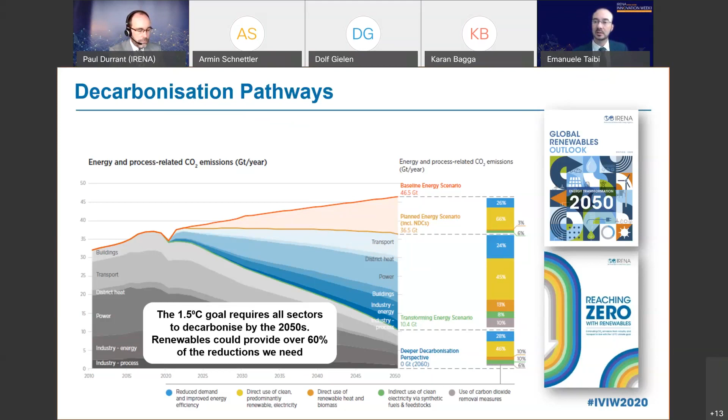So from a more quantitative perspective, setting the scene: these are the combination of insights from the latest Global Renewables Outlook and the freshly released Reaching Zero with Renewables. The point of this chart is that we need a set of solutions through renewables, energy efficiency, and hydrogen to get to zero. Increasingly, the message here is that the closer we get to zero, the more we will need to produce hydrogen derivatives to decarbonize the so-called hard-to-decarbonize sectors.

Just a quick overview on the challenge in terms of the economics of hydrogen. Today, with some of the best renewable resources at $40 a megawatt hour and current cost of electrolyzers, in some places we see better prices already today. This is from one year ago: we are still at about $3.50 a kilogram, which doesn't make it competitive with alternatives from fossil fuels.

However, with the cheapest renewable resources we're seeing today—which has improved over the last year to $20 a megawatt hour, and we've seen auctions at $15 and below these days—from $20 and below it starts to get very interesting. So what we need next to get a very strong, compelling economic case for green hydrogen is to reduce the cost of electrolyzers. We have a moonshot there: the best we guess we can get to in the next few years or few decades is $200 a kilowatt, which in combination with the best renewable resources will get us extremely competitive with alternatives, including blue hydrogen from fossil fuel with CCS. This essentially means that the combination of renewables and electrolysis is what can get us there.

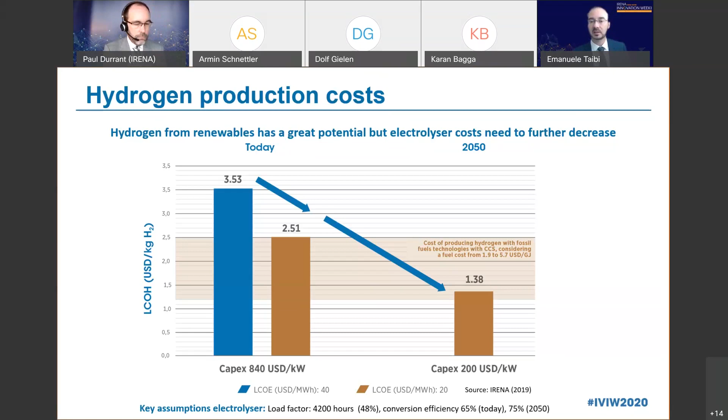Just to give a bit of perspective on how important the electricity price is: in this case, we fixed the cost of electrolyzers to a very ambitious target. We're not there yet, but we have estimates we might be able to get there in a decade, which is fairly good given the pathway to zero requires hydrogen to come up to speed in the next decade. This is the challenge we're trying to tackle today—how to get from zero to a very significant market in 10 years, by 2030.

In this case, you can see that cheap electricity is a prerequisite to get to a competitive hydrogen level. To go below $2, the only chance is to get to at least $20 a megawatt hour and below price of electricity. So only the biggest, best renewable resources can achieve that.

Less sensitive, but assuming we have this $20 a megawatt hour, then what we need to do is further reduce the cost of electrolyzers to get below $2 and into the territory of blue hydrogen and other alternatives. What you see here is that it is less sensitive than electricity, but it's equally important to scale up the production of green hydrogen through more affordable electrolysis.

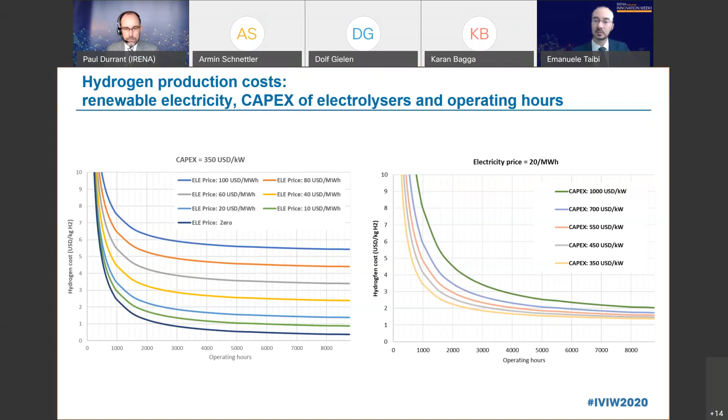So this is our forthcoming report on the subject.

For those of you not familiar with electrolyzers, essentially these are machines that can split water into hydrogen and oxygen—a very well established technology, deployed for over a century for different purposes, now for producing green hydrogen for energy use. What we're doing is to track projects that went from few kilowatts or hundreds of kilowatts a few years back to now, with announcements moving from hundreds of megawatts to gigawatt scale, and we're hearing new announcements every day reaching gigawatt scale.

What we need to do in parallel is get R&D to give us the next generation of electrolyzers while we scale up what we have today, which is already quite good. You will hear from our excellent panel discuss that in a minute.

So two key points, I think trade-offs are very important. Durability, efficiency, and cost have a trade-off. If you make it more durable, you might end up making the electrolyzer less efficient. Overall, you need to balance this to get the minimum cost of hydrogen, which is the objective.

An electrolyzer can be looked at from the perspective of a cell or of a plant. When we look at a plant, there is more than just the electrolyzer stack inside—there's much more. Our panel will talk about it, but I will also have one slide about this.

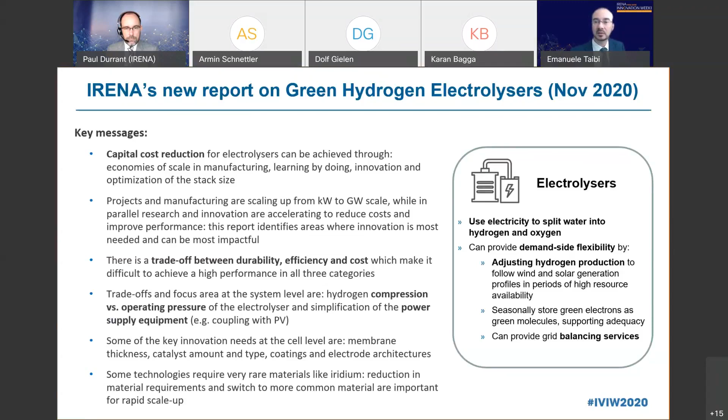One point is that we really need to look at materials, because some materials we're using are very scarce. As we scale up orders of magnitude, which is what we need, we might have some bottlenecks along the way in the supply chain.

Next slide, please. So this is, in brief, a very simplified view of an electrolysis plant.

You have the stack, you have electricity from renewables coming in, you need a transformer, you need a rectifier, and then out of the stack you get the hydrogen and the oxygen, which you need to compress and clean and feed into either a pipeline, storage tank, trailers, or ships. It really depends. And of course you need feed water supply.

This is not an issue where there is even seawater. Even considering desalination, it's not a major expense, yet it has to be a significant volume of water accessed to produce hydrogen at scale. The cost is about 50-50 between the balance of plant and stack components, with different potential for cost reduction.

Next, please. So for the balance of plant, there is a significant scope for reducing the cost of power supply—this is power electronics. We've seen a dramatic reduction for solar PV, and we'll probably see the same here.

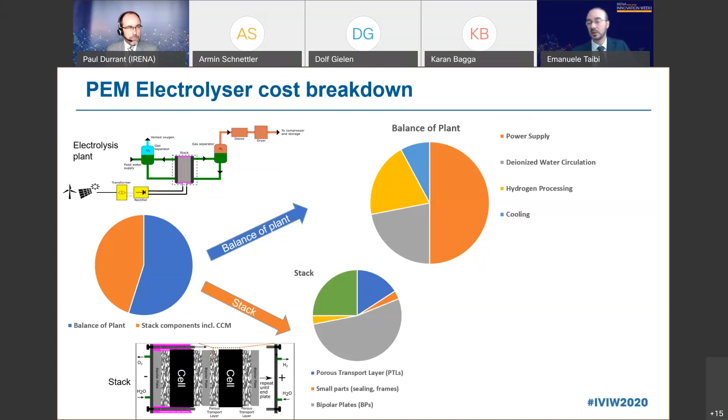Next, please. The core of the plant is the cell stack, and this is where it gets quite technical on electrochemistry. Important to note, we have several components, and parts like bipolar plates, which are not very well known outside of the industry, take a significant part of the cost.

Next, please. And then the very core, the catalyst-coated membrane, is where we see materials like iridium and platinum—here I'm talking about PEM, just as one practical example. This is where the rare materials are typically situated, and this is where some potential cost reduction can be tackled, but this is yet 25% of the stack, and so about 10% of the total plant.

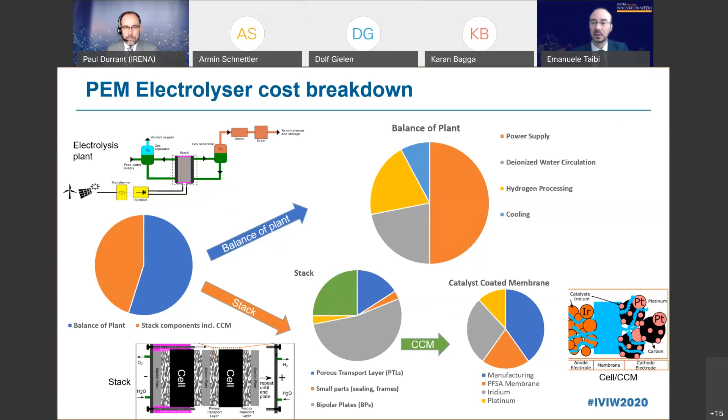Next, please. So let me conclude with what I mentioned at the very beginning. We established a collaborative framework on green hydrogen based on the call at the 10th assembly from our members to continue the dialogue between public and private sector. We have an excellent dialogue set up for today as well.

The idea is that this is very much appreciated by governments, to get insights and views and perspectives from the private sector on how to scale up, and at the same time suggestions on how to make policies and regulations align with the objectives we're seeing coming up in more and more hydrogen policies around the world.

We have a few elements identified as priority: knowledge sharing, collaboration with hydrogen initiatives—we're very pleased to collaborate with IPHE and the Hydrogen Council, which will respectively be moderating the next session and are partners for the session and the next keynote today. The nexus between hydrogen and renewables is clearly IRENA's mandate, and of course knowledge about all steps of getting hydrogen from production to consumption is very important, as well as standards, regulatory framework, and best practices.

And with this, next slide, please. I conclude my presentation. Thank you very much for your attention, and I look forward to the discussion to follow.

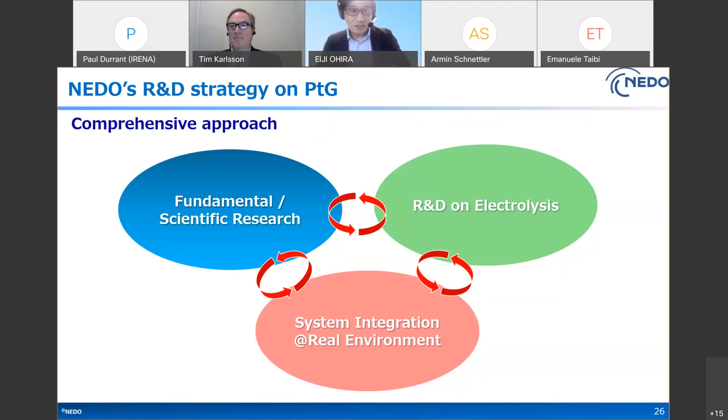So next, please. Okay, this is an approach.

The fundamental research is to understand the inside of the reaction of the electrolysis. We did several approaches: electrode, electrolyte interface analysis, observation, bubble behavior, accelerated degradation protocol, reverse current behavior analysis. These should be important for us.

We integrated this kind of analysis technology to develop a platform to understand the electrolysis itself, and we feed back this information to the material or CCM development. Well, next please.

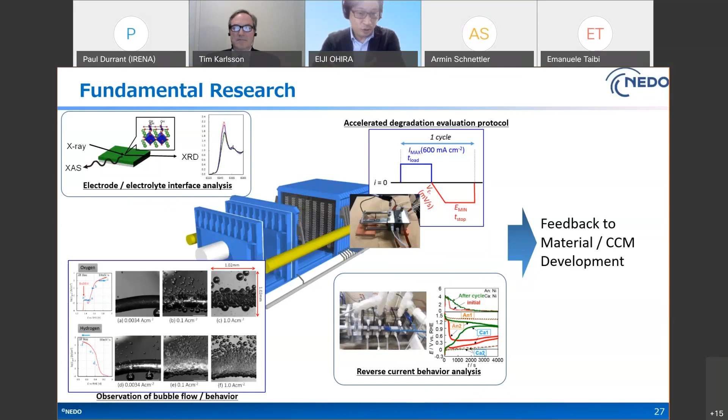This is our approach for developing electrolysis technology. Now we are focusing on alkaline electrolysis and PEM electrolysis in the short term.

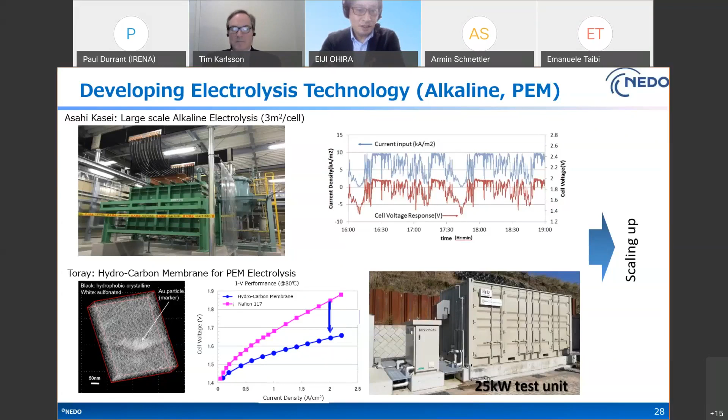Now NEDO has been conducting two types of large megawatt class Power-to-Gas projects. First, we started the kilowatt class around 2015, and after closing that project, we moved to the megawatt class.

Our first plant provided green hydrogen to the Tokyo Olympic Games this year, but unfortunately it's postponed to 2021. Maybe I'll be happy to introduce this technology for maybe the next Tokyo Games.

Later on, we also developed a 1.5 megawatt PEM water electrolysis Power-to-Gas plant, and we utilize large scale metal hydride hydrogen storage combined with compressed hydrogen storage.

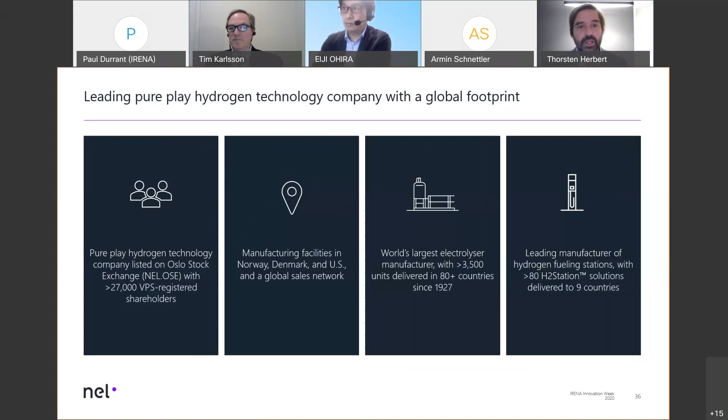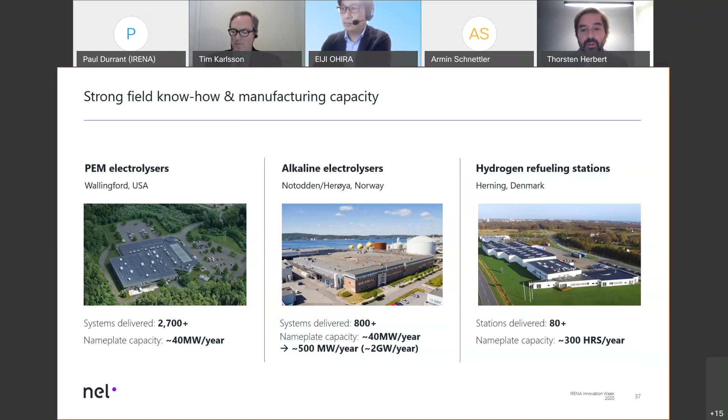Looking into the manufacturing facilities, and pointing out one very interesting fact: if you look at the PEM electrolyzers, we are now in the US with 40 megawatts per year capacity. But the highlight, and I will dive deeper into that in one of the later slides, is that we are now preparing the plant in Norway to be capable of an output of 500 megawatts per year by end of next year. This is currently in the process. And a very good perspective is that this location, which we also see in the picture, is already capable of being expanded to 2 gigawatts per year just by quadrupling the equipment here. And then the refueling stations in Denmark, we are ready to build up to 300 stations a year.

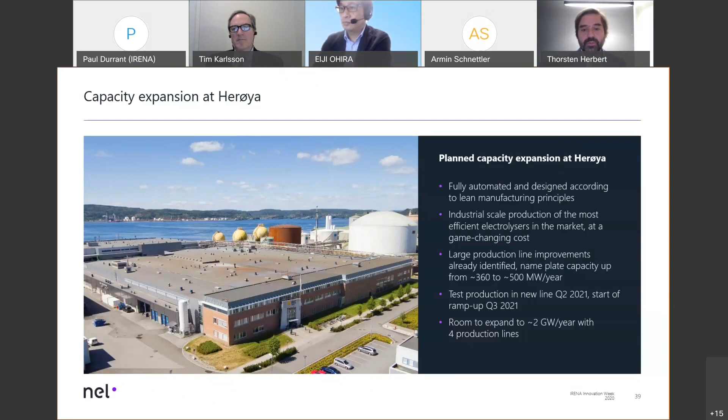So, two latest developments. Again, one highlight for us, and that leads me to a comment on one of the earlier presentations - the introduction by Emanuele, looking at the scenario with $350 per kilowatt, really with the perspective to have this huge capacity and the fully automated manufacturing principles in place already soon. We just lately, in our latest deal, already sold our alkaline technology in this price range. So if we really anticipate what we can gain from this upscaling in manufacturing capacity, we are already there. This will start test production mid of next year and will be ready for full capacity end of next year. And as I said, just by multiplying the lines, we would be able at this location to also ramp up to 2 gigawatts per year.

Looking into the technology, we lately got some key R&D grants newly granted - two quite large ones for our R&D activities, addressing both technologies we are offering. On one side, the alkaline electrolyzer: we have an R&D grant here in Norway improving the next-gen alkaline electrolyzer, also at pressure. And on the US side, a quite significant grant also to develop further our PEM technology with regards to components, manufacturing methods, but also optimizing flow and conductivity of the stack.

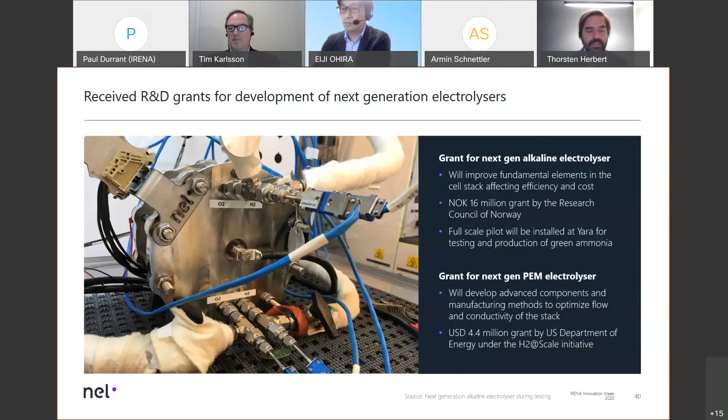Quickly looking into the European momentum. I think you're all aware that beginning of July, the European Commission came up with this very ambitious strategy - we're talking 40 gigawatts installed electrolysis capacity in 2030, but already 6 gigawatts in 2024. And this is actually, and that is one of my messages I want to bring across, this should be our main target. So we should, in Europe now, really focus on this 6 gigawatts in 2024 and come up with a roadmap of what we need to do, what we need with regards to policy measures.

One other thing before I come to the end: we already have funding mechanisms in place to come to this milestone of 6 gigawatts by 2024. But I think the key, as mentioned in my subtitle, is really that we as an industry cooperate and coordinate with each other to utilize these funding schemes in the most efficient way, and also address the additional needs we have.

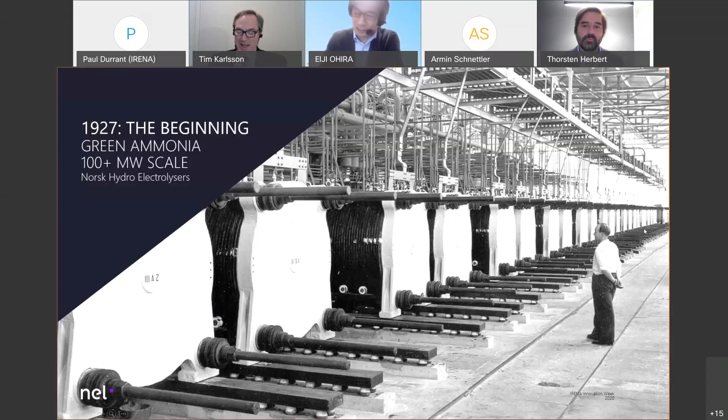Hello, I hope you can hear me well. Good morning from Brussels, I hope you are all safe wherever you are. It's a pleasure to speak to you this morning about large-scale PEM water electrolysis. I would like to give you an insight into the current status of the technology and a little bit about the way forward. Next slide, please.

First, I need to make an introduction, because Hydrogenics was well known in the field of hydrogen, but Cummins is, I would say, the new kid on the block in hydrogen. Cummins is in fact a large US company with more than 100 years of history in the field of energy, mainly in combustion engines, diesel and gas engines, for both the mobility sector and stationary power generation. Due to climate change and the energy transition, Cummins decided to diversify its technology and entered into electrification technologies already in 2018. In 2019, there were several acquisitions in the field of hydrogen and fuel cells. Cummins has more than 60,000 employees worldwide and a presence in more than 190 countries.

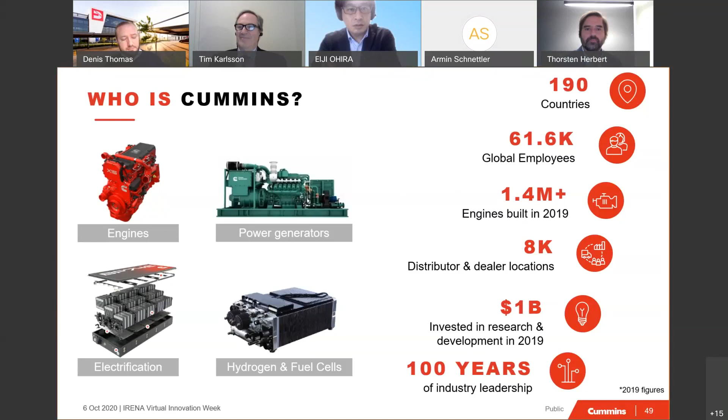Next slide, please. The activities of Cummins in the field of hydrogen are quite wide. We have technologies in electrolysis, which I will present in a minute. We also have technologies in fuel cells, and in hydrogen storage tanks. The idea is to be able to offer complete systems, both on the electrolyzer side and on the fuel cell powertrains for mobility.

Among those acquisitions, the major one was Hydrogenics, which included electrolysis and PEM fuel cells. A couple of years ago there was also the acquisition of the solid oxide fuel cells business of General Electric. And there is a joint venture with NPROXX in Germany on hydrogen storage tanks. The aim is to be a top performer in industrial hydrogen generation, but also in Power to X, which I think is the focus of today's discussion. On the mobility side, our focus is mainly on heavy-duty mobility, like trucks, trains, buses, etc. Next slide, please.

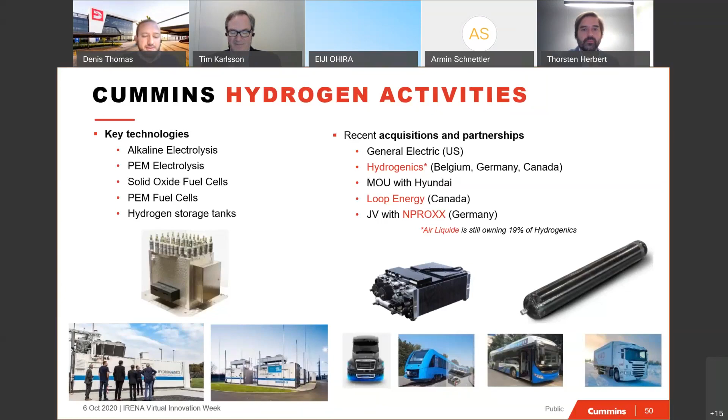Concerning electrolysis, we are one of the few companies having different technologies in electrolysis. Alkaline: we've been active in that space for more than 30 years, as you can see on the product table, and I know a lot of you like numbers, that's why I've included that slide in my presentation. At Cummins, our alkaline technology is more in the kilowatt scale, because we use pressurized technology up to 10 bar, with a possibility to increase it up to 27 bar.

Our biggest product is in the range of half a megawatt, with a production output of 100 normal cubic meters of hydrogen per hour. The philosophy on those products has always been to deliver turnkey systems, including all the utilities, with a plug and play design.

On the PEM technology, which is really the focus of my presentation today, we've been developing this technology for over the last 10-15 years. We already have commercial products at 2.5 megawatts, which are containerized systems, and we are currently developing our product towards 5 megawatts and bigger. In this case, we will not follow the containerized turnkey approach, because we believe that for bigger projects there is a need to integrate those technologies into much more complex systems. So we are partnering with a lot of EPC companies, because we think they can bring a lot of value and know-how, and they can bring a lot of cost savings to large-scale systems.

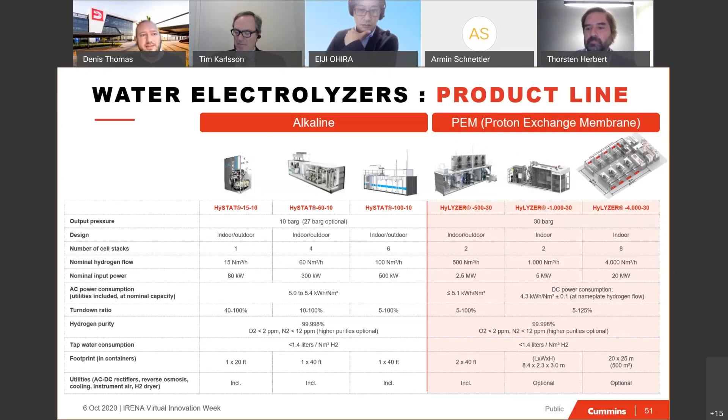Obviously, the building block that we use for the PEM technology is a PEM cell stack, with cells with a surface area of 1,500 square centimeters. What you see here is a 1.25 megawatt cell stack, which can also operate up to 1.5 megawatts, and that's the building block of the current commercial product.

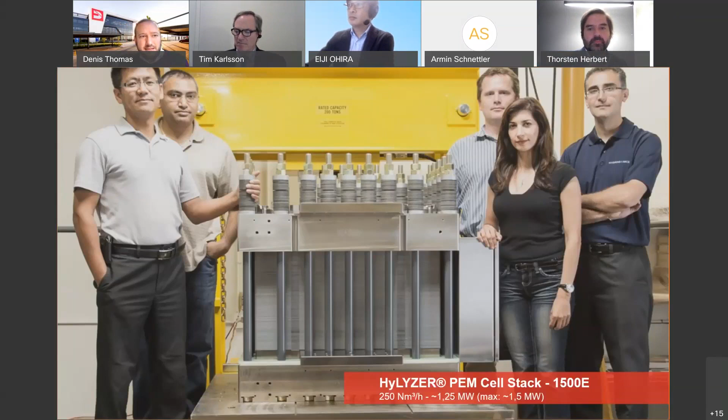Using that building block, this is the type of system that we can deliver today on a commercial basis, between 1 megawatt and 2.5 megawatts, just by playing with the number of stacks used in that system. Obviously, one important word when we speak about cost reduction is standardization, and that's something we are developing right now, to make sure we use standard platforms that will allow us to reduce cost in the long term by getting into large volumes.

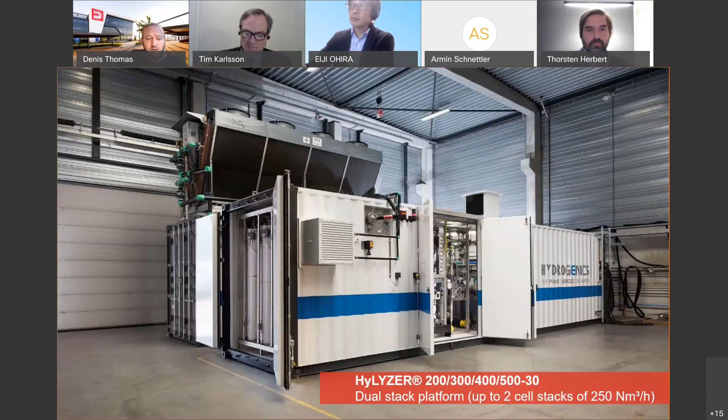Concerning this technology, it has already been deployed at a number of sites. We have more than 15 projects in the megawatt scale range, for various types of applications and in various geographies. You see some of those pictures here.

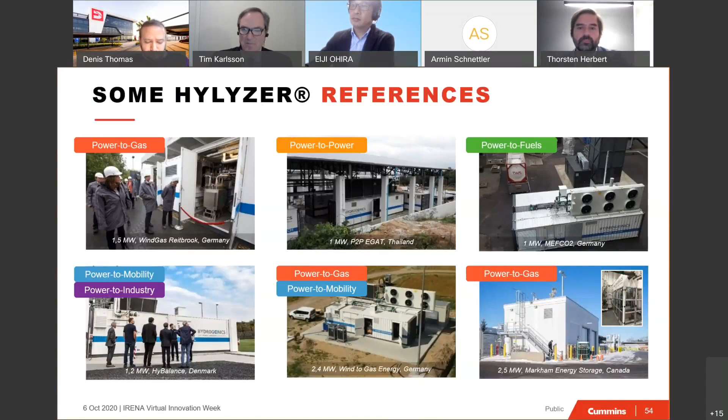Concerning the current development, we are upscaling our building block. The 1.25 megawatt cell stack, we are doubling its capacity by doubling the amount of cells. And obviously, by doing that, you don't double the cost. Our general philosophy at Cummins is bigger is cheaper, and that's what we will follow also for the balance of stack and balance of plant. By doing that iteration, we end up with a building block of 2.5 megawatts, which is interesting for megawatt-scale projects.

Again, we are also at the very initial phase of the learning curve on PEM technologies, so we still see a large potential for cost reduction with this technology.

Concerning efficiency, I've presented the efficiency numbers in the table of products, and I think this was also related to some of the questions in the chat: how do you compare efficiencies? I think it's really important that each time you mention this, you refer to what you're actually discussing in terms of scope of supply.

Concerning the PEM technology, it is very well suited to connect directly with wind or solar energy, because it has the ability to react very fast to dynamic operation, in terms of seconds, with a very wide operating window. It is also very compact, and has a lot of benefits in terms of maintenance, especially because we don't use KOH, which is the case for alkaline technologies. Finally, with this technology we can deliver systems with a 30 bar output pressure, which is quite interesting when you want to make power-to-gas systems, or if you want to inject the hydrogen into industrial processes.

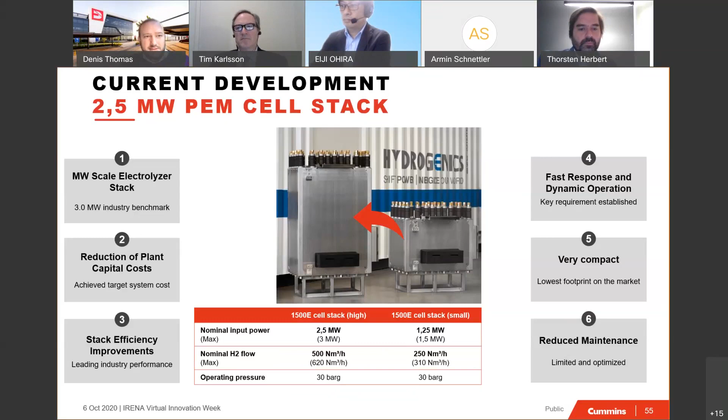Using this 2.5 megawatt building block, we have developed the HyLYZER-1000, a 5 megawatt product integrating 2 stacks of 2.5 megawatts. What you see here is the standard and modular solution we offer today, including the heat exchanger, the water polishing system, and the gas-liquid separators. It's an indoor system, but to allow safe operation, we have enclosed all the sensitive areas where hydrogen is generated.

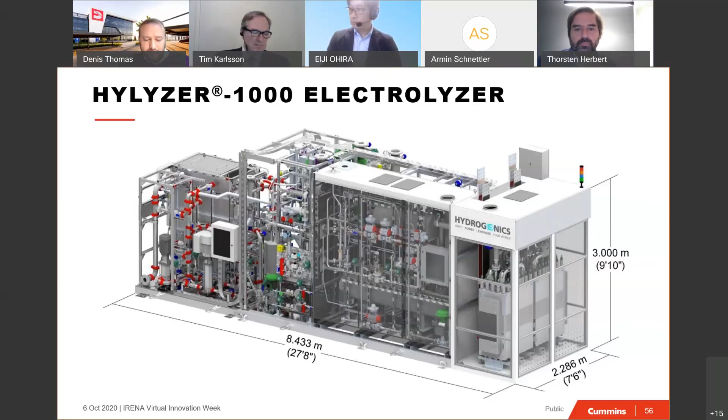And that's typically the type of scope of supply that we would see for Cummins in the future. And then all the rest of the plant, meaning the water purification system, the cooling of the systems, and all the medium voltage—that's something that can be done by a local EPC, which can actually lower the cost of the complete system.

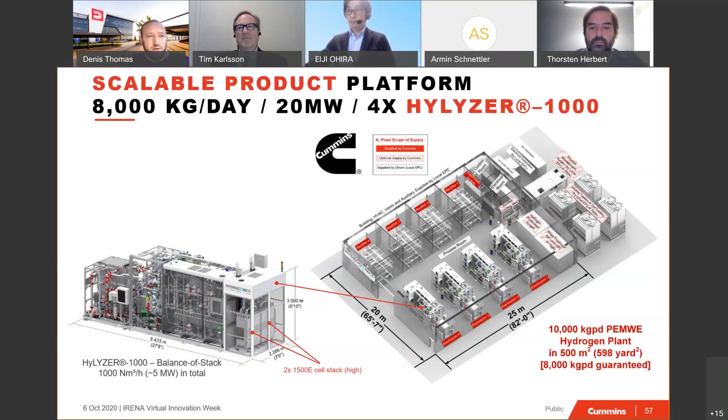Next slide, please. So to conclude, what I want you to remember is that bigger is cheaper. That's what we think. We are today validating this 20 megawatt project, which will be the basis for projects up to 100 megawatts. But if we want to be able to deliver gigawatts, we will need to make a next iteration into our products.

For us, it will go through bigger stacks, even more than the 2.5 megawatts, also bigger systems, having more stacks sharing the same balance of stack, and obviously standardization and partnering with EPC companies.

Thank you for your attention.

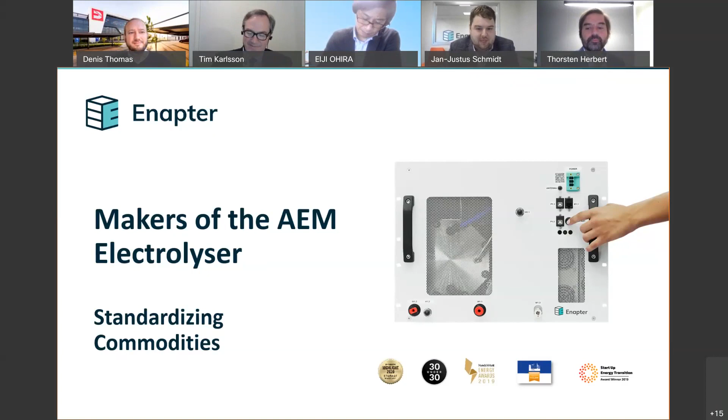So at the core, Enapter is an R&D company. Our origins lie with a catalyst development team that was working on non-PGM catalysts, and then developed the foundation of our electrolyzer technology. Today we continue to strongly invest into this path and develop our electrolyzer technology. It's really fun to work at Enapter because our AEM electrolyzer technology is quite young compared to the traditional alkaline and PEM technologies, and so we still see even now a lot of untapped potential to further improve it.

So on this slide, you can see our current product, the EL2.1. We're really proud of this machine. It's been developed over the last 2 years, iteratively developed over the last 2 years. And this machine is now significantly more compact, more efficient, and lower cost than all its predecessors.

And we think it has a very strong position in the market with regard especially to energy efficiency and cost for this type of size of unit. Each EL2.1 produces 500 normal liters of hydrogen gas per hour, already pressurized at 35 bar. And multiple units of these can just be stacked together to reach any desired production rate that is needed for a project.

So why is it that we are building such a relatively small building block, and why can we do this cost effectively? The answer is on the next slide, and it lies in our patented AEM technology.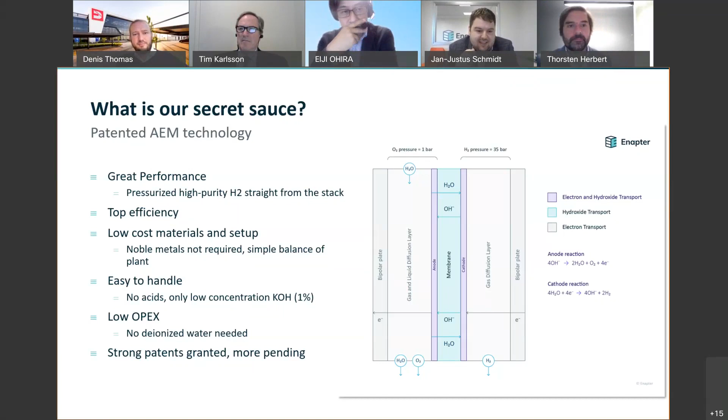So talking about efficiency, I've included here a polarization curve, for everyone to understand the actual underlying details of the performance of the electrolyzer. Currently, when we are operating at nominal production rate, we run our stacks at 0.8 amps per square centimeter. You cannot directly compare this with other technologies, but within a technology, you always want to improve the current density to be able to have a smaller stack with less active area to produce the same amount of hydrogen. At our current density of 0.8 amps per square centimeter, we operate at a cell voltage of just over 1.7 volts, and this leads to a really great stack efficiency.

Our balance of plant is so simple that actually also for that only very little energy is needed. Our current system has a steady state power consumption of 4.8 kilowatt hours per normal cubic meter of hydrogen - that's for the complete system. For the stack, it is actually just 4.3 kilowatt hours per normal cubic meter.

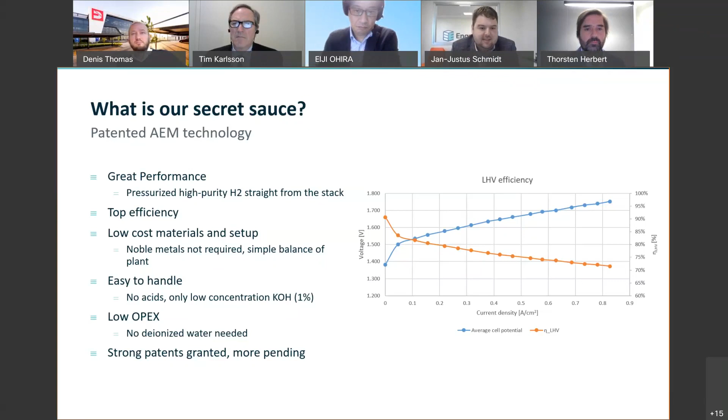Okay, so I've mentioned it in the beginning - we are scaling in a very different way. Rather than building very large individual units, we are building small units that we want to mass produce. You can draw an analogy to PV panels, for example, or also to the IT industry. In the 1980s, computers were getting bigger and bigger, filling up entire floors and skyscrapers just for a computer for one company. And these mainframes, these big computers, they don't exist anymore. Nowadays, all servers and large computing centers are built up from modular computers, blade computers that are just stacked together. And all of this is based on PC architecture that has replaced these giant machines with modular small commodity items.

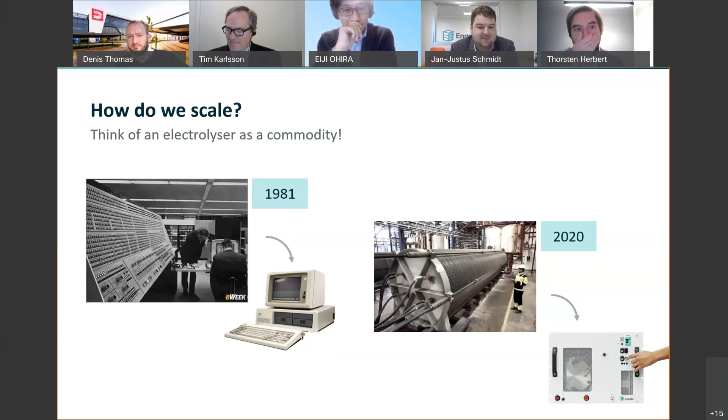And so our electrolyzer is the PC of the hydrogen industry.

This is where we are at with our development. So when we started in 2017 until today, we have almost halved the price of our electrolyzer, keeping the size and production rate the same. We are aiming to release a new version of our product every year, making each individual building block smaller, more efficient, and lower cost. So by the time that our mass production facility will be up and running, we think that the cost of our electrolyzers from today will be just 20% of what it costs today.

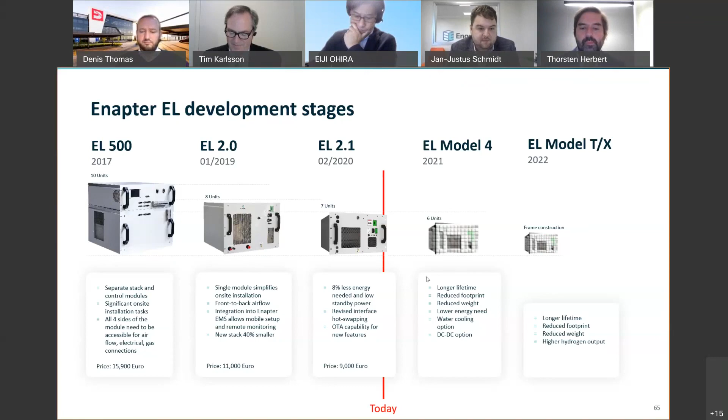Stackability is extremely important. So whereas each individual unit we want to make as compact as possible, we then have to stack them together to make them very easy to use for any kind of application. So today, most of our customers put our electrolyzers in cabinets, such as the ones on the left. And we are now working on deploying the first container, which has roughly 150 kilowatts. This is just made up of stacking EL2.1s together.

Then the other project that we are working on right now is the AEM multi-core. So when we're looking at large-scale systems, we see that we can benefit both from the cost reductions of the mass-produced electrolyzer building block of the stack, as well as the typical cost reductions that come with centralizing those components that do not scale with unit numbers.

So we can centralize the balance of plant for the megawatt scale system and just put in hundreds of our stack modules, and that can easily be stacked to the right number to match the production rate that's needed. With this kind of system, we will have extremely high reliability and extremely flexible control, because each string of modules can be individually controlled.

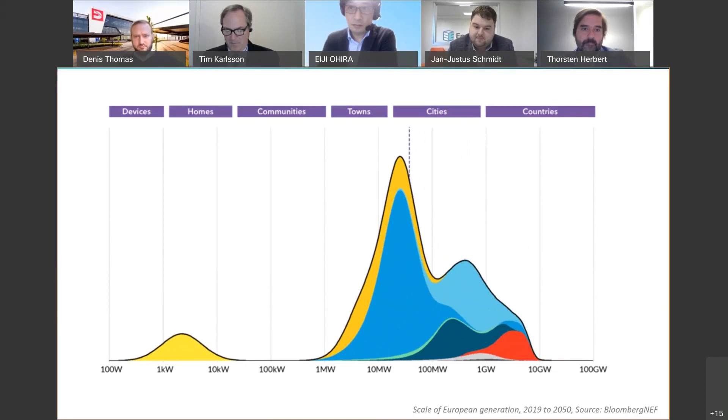The solar panel has disrupted the electricity world and made energy consumers into prosumers. We think that with our modular decentralized electrolyzers, the same can be done to fossil fuels.

Thank you very much for your attention, and look forward to the next discussions.

That's great, Jan, thank you very much for that presentation. When I saw the agenda, I very much looked forward to seeing your presentation, given your focus on small scale and modularized build-up versus some of the others. That was great that we got the full spectrum of electrolyzers and processes on the panel.

Thank you very much for that presentation. I would like to now move forward to the Q&A session with all the panelists. I hope all the panelists are now available. I have some questions that have come forward, and maybe I can start with a couple, and then we can check for some others as well.

A few of the questions we have - we did have a discussion around the efficiencies of electrolyzers, and there's a number of different versions, or at least numbers out there around what the efficiencies of electrolyzers are. I wonder if anybody would like to talk in general about this - we heard some numbers, but is there easy comparability? There's a number of figures floating around, and I'm wondering if one or more of you would like to talk about the energy efficiencies of electrolyzers.

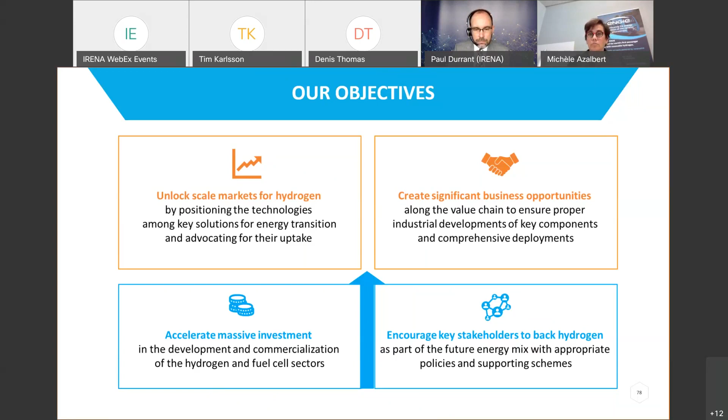Next slide, please. The Hydrogen Council has the ambition to first accelerate significant investment in the development and commercialization of the hydrogen and fuel cell sectors. Second, gather actors along the value chain to ensure industrial development of key components and comprehensive deployment of renewable and low carbon solutions based on hydrogen, while increasing visibility of existing hydrogen solutions and the progress being made in the sector. Third, provide recommendations and encourage key stakeholders such as policymakers, the business community, international agencies and civil society to increase their backing of renewable and low carbon hydrogen as part of the future energy mix with appropriate policies and supporting schemes. And lastly, advocate for the important role of renewable and low carbon hydrogen technologies in helping to meet climate goals, energy security and competitive targets. Next slide.

Our vision is that hydrogen has a key role to play in the energy transition. Based on an in-depth analysis of real industry data, we estimate that costs will sharply fall by 2030 thanks to the scale-up, making hydrogen a competitive low-carbon solution for 22 applications and addressing 15% of global energy demand. By 2050, hydrogen reaches its full potential, delivering 6 gigatons of CO2 abatement annually and 30 million jobs, representing a $2.5 trillion market. Full information about this report is available on the Hydrogen Council website.

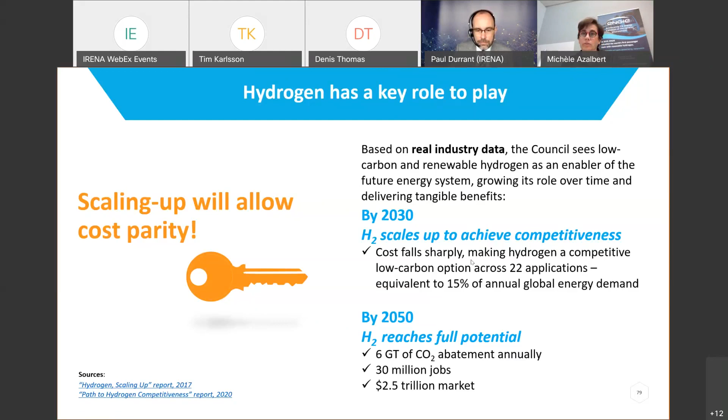The second part of my presentation is to share what potential we see for e-fuels, and more specifically for ammonia. Ammonia is today mainly used for fertilizer production. It's a first activable segment where the competitiveness gap between renewable hydrogen-based ammonia and fossil gas-based ammonia is the lowest, so it's a low-hanging fruit in terms of decarbonation. It also does not require changing the production process of ammonia, which consists in capturing nitrogen and combining it with H2 through the Haber-Bosch process.

Today, some figures: half of the 70 million tons of hydrogen produced annually is used as a feedstock for the production of fertilizer, mainly ammonia, and the rest is used by refineries for the production of biofuels, methanol, and other processes. So today, ammonia is a significant market on its own, and it will continue to grow at a rate of around 2 to 3% per annum according to experts. Most of the ammonia produced, around 80 to 90%, is used for fertilizer production, and the remainder is used for explosives and other chemicals like refrigerants, cleansers, textiles, resins, and so on.

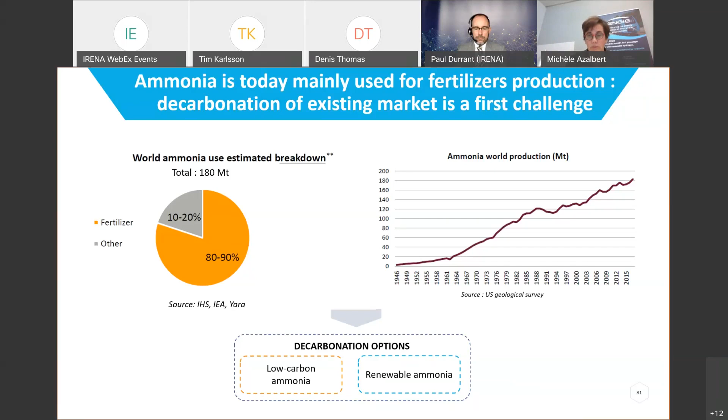In addition to the fertilizer sector, ammonia can also be a clean fuel for local cogeneration or coal plants, whereby you can inject ammonia directly into the coal plant to produce electricity. It can also be a fuel for mobility, thanks to ammonia fuel cells, serving as a clean fuel especially for heavy-duty mobility.

Beyond just ammonia, e-fuels will contribute to decarbonize mobility, especially heavy-duty mobility. Why so? Because batteries are not today the solution, mainly for autonomy and weight reasons. E-fuels entail a wide range of zero carbon or low carbon fuels, like gaseous H2, liquid H2, synthetic gas, renewable ammonia, e-methanol, e-LNG, and also e-kerosene, addressing different types of heavy-duty mobility: road mobility, shipping, aviation, and rail.

Today, within existing port facilities, within 120 ports, you already have ammonia trading facilities, so you can have direct access to that.

In addition to the potential of the fertilizer market, taking into account the potential of the heavy-duty mobility market, some experts consider that ammonia production could increase by 30% for the shipping market, representing 150 million tons per annum. It could also develop for energy uses, leading to an ammonia market of 430 million tons in the long run. This is 2.4 times more compared to what it is today.

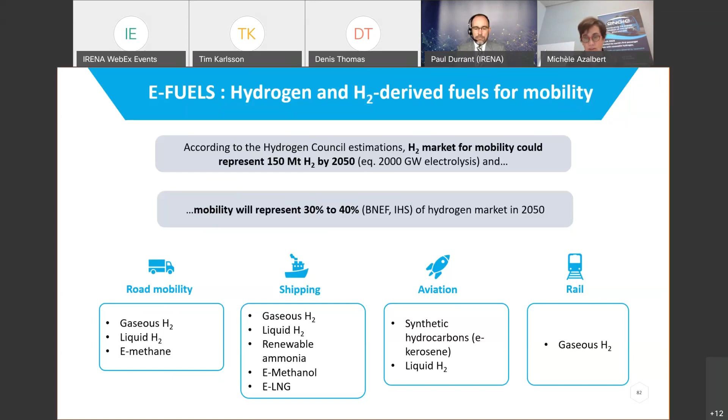In the long run, we will export renewable resources from countries having a massive excess of renewable energies to countries that will not have enough to meet their domestic demand. Today there are different options available. As an energy vector, hydrogen can be transported over long distances through liquefied hydrogen or different forms of hydrogen carriers, such as ammonia, methanol, formic acid, synthetic natural gas, or liquid organic hydrogen carriers. Some of them, such as synthetic gas or ammonia, can rely on existing infrastructures.

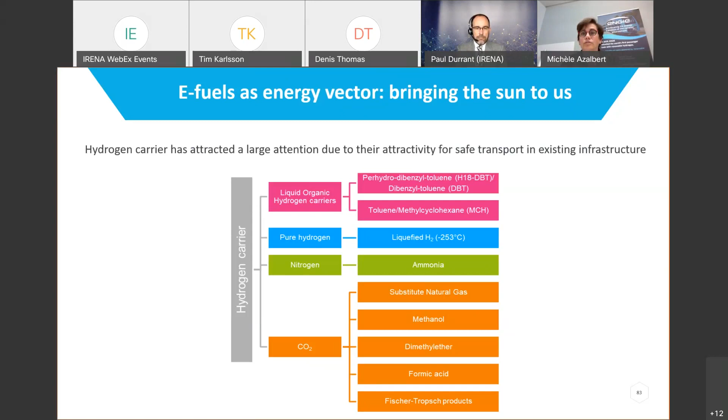So maybe a few words about a concrete project we have today in the portfolio. One example around e-methanol: the purpose of this project, already developed for the first step with a design achieved, is about the production of e-methanol in the north of the Netherlands, in the Groningen region, at our plant in Groningen, Eemshaven. This is an industrial scale project developed in three phases, and the first one is about 100 megawatts. The product will first be used in the chemical area nearby. But this project is at the core of the European Hydrogen Valley, so it can distribute renewable hydrogen to nearby countries.

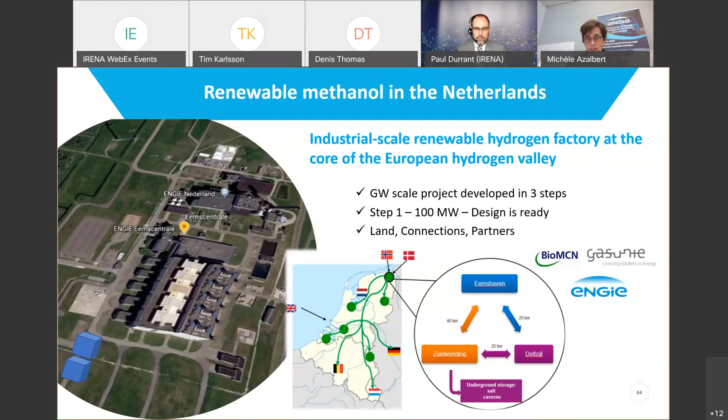A second project is about ammonia. It's again an industrial scale ammonia production project based on renewable hydrogen, dedicated in the first step to fertilizer production of zero carbon ammonia. It's a project at gigawatt scale developed in three phases, starting with a double-digit phase. Again, the design is ready, and we developed it together with Yara in Australia.

And it's exactly what has been said in the previous panel session: it's about finding the right, optimized design whereby you minimize the total capex of the solution, linked to the production of renewable energy, the storage of renewable electricity, the storage of hydrogen, and also the distribution of hydrogen. At the end of the day, it's about finding the right design that will lower the cost of the total solution but also provide a reliable solution. It's about flexibilizing the downstream process, extracting some flexibility to reduce the total cost of the solution. And lastly, it's about energy management in order to optimize any excess or any shortfall of renewable energy.

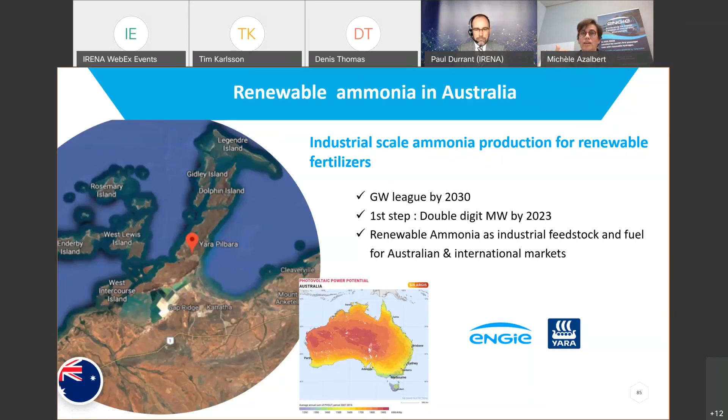So it's all about that - it's about integration, but also about development and establishing the business case, whereby you not only have the long-term offtake, you not only have the technical solution, but you also have the subsidies that will help the project take an investment decision right now, because the product compared to fossil alternatives is more costly.

There is today a scientific consensus on the reduction of renewable H2 production cost, and renewable H2 should be competitive with grey hydrogen by 2030 in the best geographies. However, green H2 production comes at a higher initial cost than its fossil equivalent, so we face this competitiveness gap compared to the alternative fossil solution. We need today a supporting scheme in order to trigger this cost decrease and to bridge the competitiveness gap in the early years.

So we believe, within the Hydrogen Council, that we need policies to support the development and takeoff of renewable hydrogen, relying on three main pillars. The first is on the supply side: to provide subsidies or set up a contract for difference mechanism to offset, on a temporary basis, this competitiveness gap. The second pillar is on the demand side: to set short-term and medium-term quantified targets for industry and transport, stimulating demand via public tenders. The last pillar is about developing a roadmap for decarbonization of the energy system, followed by concrete action, such as implementing a traceability system like guarantee of origin, distinguishing renewable hydrogen from low carbon hydrogen to give both products a chance in parallel, and also implementing storage obligations, because the system will require this kind of flexibility solution.

So talking about scaling power fuels, I'll link up to the discussion presented by Michèle earlier on. What are we talking about when considering fuels, and also chemicals in a sense, or energy carriers more broadly, from renewable power? That obviously always starts with electrolysis, but then can get a bit confusing and complicated.

That's why I listed here what we see are the main processes in conversion. That would be methanization of hydrogen and making synthetic natural gas from it, Fischer-Tropsch processes, and methanol synthesis as the most important ones to derive liquid hydrocarbons that could essentially replace most of the current applications for crude oil-based products, and then ammonia synthesis, which Michèle touched upon earlier on.

Now the question arises: which of these fuels will play which role in the future, and more importantly, where can we get the carbon from that we would need for those synthesis steps? The nitrogen is a bit easier, but for carbon it is a tricky question that I think we will touch upon in the panel. Maybe the last point on this slide—we really see power fuels, or e-fuels as we call them, as a solution in almost all sectors of the economy and the energy system, to different degrees.

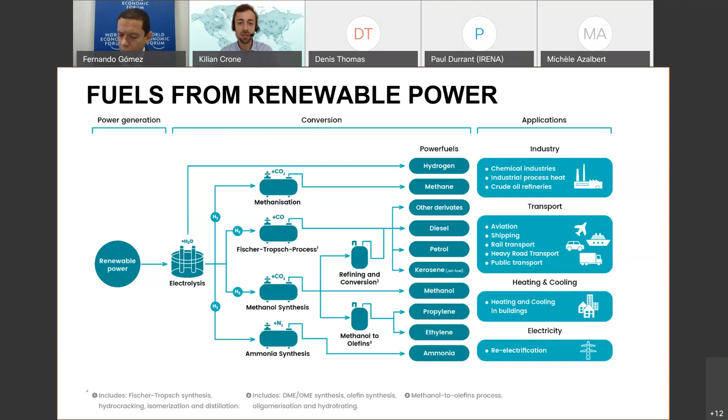I brought with me for a bit more detail the next slide, if you could switch please. We ran a study, about to be published, on a 100% renewable energy system in 2050. Many of you will say, okay, 100% renewable in 2050—is this really necessary or realistic? It's a bit of an exploratory scenario where we trace being in line with the Paris Agreement. What would that mean in terms of transition for the global energy system?

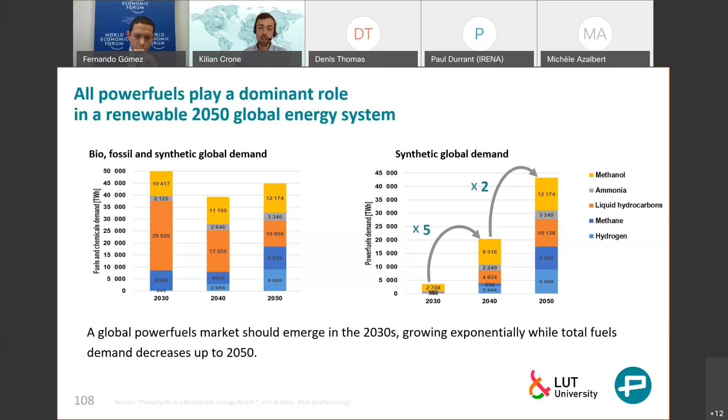On the next slide we also analyzed what that would mean for global trade. Yesterday I was on a panel discussion and some speakers said hydrogen would be the new oil. But for it to actually become the new oil, the key component we are lacking is tradability. Tradability works best with liquids. It does work with hydrogen to some extent, but it's just way more complicated.

We analyzed in this study, the same study forthcoming very soon, who would actually trade, why would they trade, and how much would they trade. We see that especially Europe stands to benefit strongly from the import of liquid power fuels from other world regions that have lower levelized costs of producing power fuels, while other regions—especially Sub-Saharan Africa and South America—could benefit as main exporters. That's not surprising looking at levelized cost, but it is maybe a bit more surprising that other world regions have less of an incentive to do so.

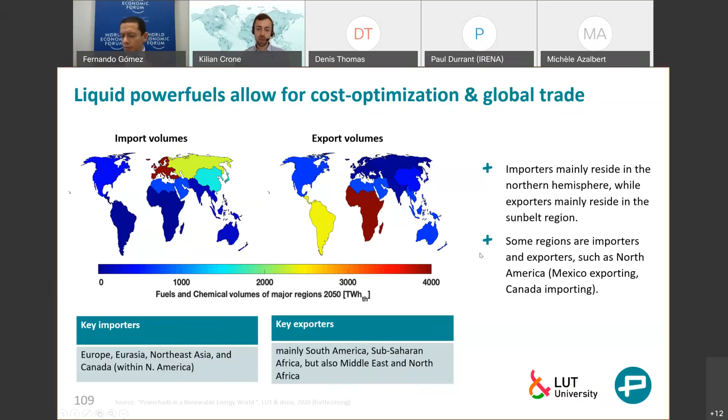Now, finally, on the next slide, what does this mean for innovation?

I didn't want to overcomplicate things here, so just two short points. What's the role of innovation on technology? I think we've heard in the previous session that hydrogen electrolyzer technologies stand ready to be scaled at industrialized scale.

I can say for most of the other synthesis steps that I just presented, they are commercially available, sometimes for decades or centuries, to be bought from equipment manufacturers. So most processes are proven and commercially available. The only exception is direct air capture of CO2 from the atmosphere, something currently being tested and demoed, and some new synthesis routes that provide or potentially provide efficiency gains.

However, process integration matters. That's what we also saw for the electrolyzer discussion earlier on. But R&D is to play a smaller role in this scaling up that we are discussing at this session. So technology may be a bit less important than the other point, which would be policy innovation.

Not in the sense that we don't know how to give the right incentives, but that we actually get into doing. And we know from our discussions with private sector stakeholders, they need targeted regulatory support. That could be offtake schemes - that would be the ideal and easy solution - for example, contracts for difference. There could be fuel quotas or the ability to fulfill other kinds of mandates and obligations through power fuels.

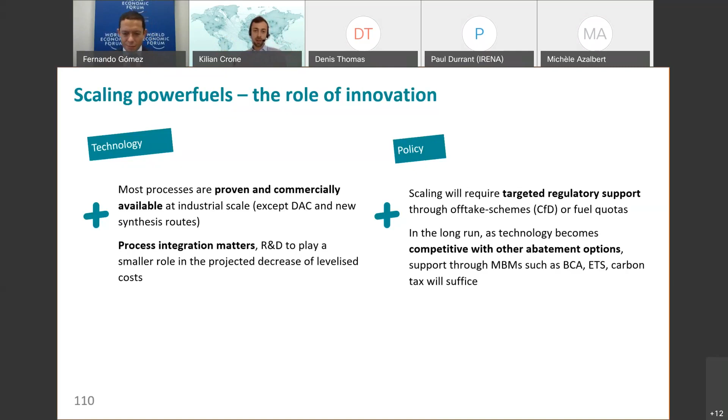Thank you, Fernando. Thank you, Kilian and team for the flexibility. This as an introduction has been quite good to show the broader landscape.

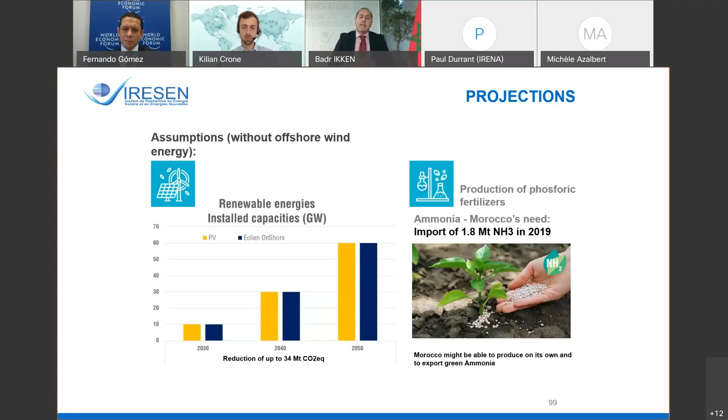This is why in our R&D strategy we are preparing a new R&D platform called the Green H2A, green hydrogen and applications. At the beginning we spoke about green hydrogen and ammonia; now we're speaking about green hydrogen and application. The idea is to have different steps, and this R&D platform in the middle will integrate different pilot projects. We are now in the selection phase for an industrial partner to develop this facility with different projects, and I will give more information in the next slide about those projects.

It's important to say that we will have a range of 5 megawatts regarding the production of green ammonia using different electrolyzers, as well as ammonia synthesis and production, and power to liquid production of synthetic kerosene and synthetic diesel. This will start by the beginning of 2021. In 2022 in Morocco, we will launch a reference project with a capacity of 100 megawatts, and the target is to have it by 2024 for commercial use, as well as to use it in industry.

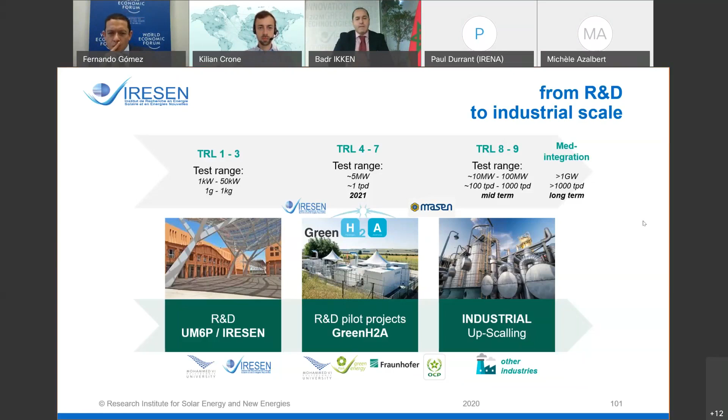This is the structure of the Green H2A, as I said, different electrolyzers as well as power to liquid. The idea regarding this R&D platform and the call for proposals is to fund different pilot and demonstration projects, the use of ammonia for other applications, not only the fertilizer industry, but also the production of other e-fuels.

And this is the last slide, I guess. The idea is to develop, and this is what we would like to do with our partners, a regional clean energy union, to develop an ecosystem together jointly, and to have a development of an industrial regional cluster.

We saw in the past, and this is maybe one of my last comments regarding solar energy, it's a little strange that even if we have more than 600 million Africans without access to electricity, meaning there's a huge potential for PV, we still saw a lot of companies in Europe go bankrupt. I think regarding the hydrogen strategy and power to X, we have to work together, and I hope that European countries will collaborate together.

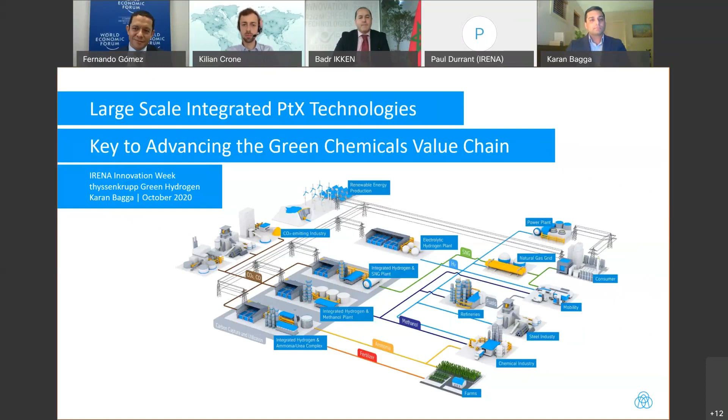So there are economic barriers that exist, and we talked about a lot in the previous session as to what there may be. Electrolyzer scale in particular was one of the main reasons quoted, and I think we're all very well aware of the way industry is heading. We as a quite large scale electrolyzer supplier also totally agree with the sentiment and the comments made in the previous sessions.

The only way to reduce the cost here is by scale up, large scale. So I won't touch base too much on the first point, it's quite clear, but the second one maybe is of more interest, which is the intermittency. That's a challenge that we heard about just before in previous sessions, our very knowledgeable panelists talking about what exactly intermittency does to PTX value chains.

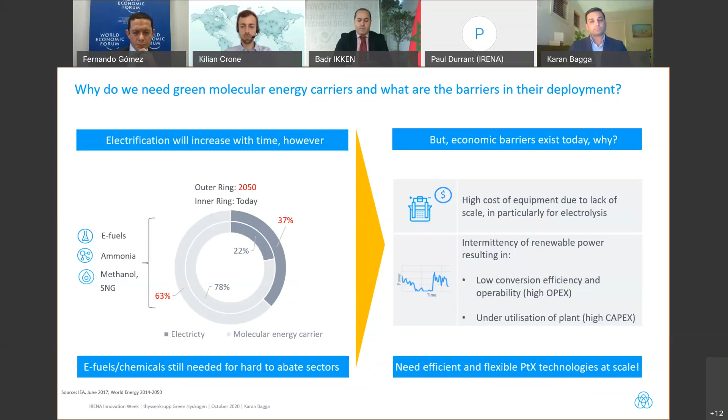So essentially, with all that randomness being introduced into the system, it gets imposed on the very first part of the value chain, the critical part, which is electrolysis. We heard about that previously, that electrolysis obviously has to sing and dance according to the energy supply from the renewables, and that essentially creates a different harmonics of the randomness. Then you've got hydrogen storage to even everything out, because our last technology block, which is the chemicals conversion, does like to run in steady state. As much as electrochemistry likes to be at steady state, catalytic chemical reactions even more so.

So how do we take all of that that's so random and turn it into something that is steady, and still come out at the other end with a unique and credible business case? That's the challenge. Perhaps in our view there's a two-pronged approach - just like with any other thermodynamic system, it's a case of minimizing the introduction of randomness or entropy in this case, and then once it's in there, to mitigate it. So there are two pathways.

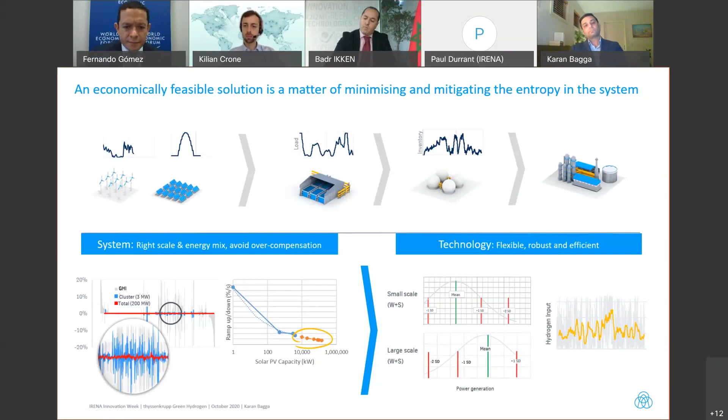We'll probably have about a minute of your presentation. Yeah, no worries, it will only take a minute.

So that's essentially shown in the next slide. This is something we do all the time, for every project, for every customer that would like a full-scale end-to-end facility. It's a matter of looking at all the value-unlocking facilities and coming up with a concept that delivers the best economic value. Next slide, please.

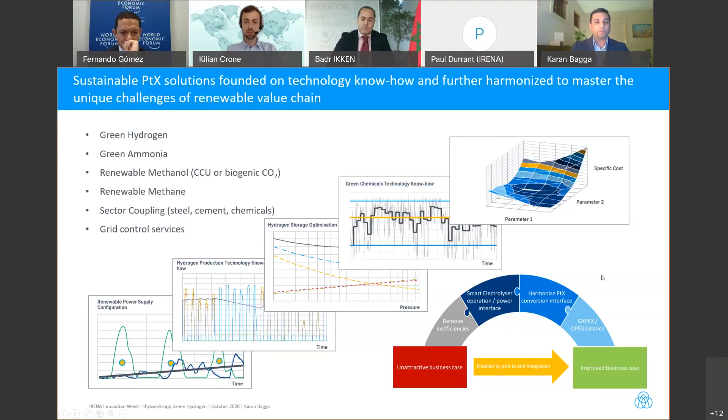Together with a very large-scale portfolio of key equipment such as electrolysis—this is our 20 megawatt plant, 4,000 normal cubic meters an hour, flexible, purpose-built to sit on the back of a chemical facility. That's the key point here—we are ready in this sense.

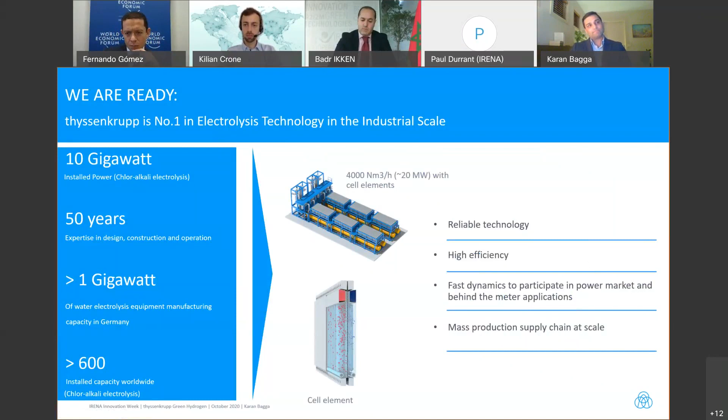And then, last slide please—for how this actually balances or sits on the back of large-scale chemical facilities. Here too we have concepts for ammonia, reference capacities. The largest plants ever built in the world today are ThyssenKrupp's, over 3,300 tons a day. For ammonia plants, we have capacities available from 50 to 5,000 tons a day in a single train.

We've specifically designed and developed concepts for decentralized as well as centralized applications, as well as export grade—that's where the Australian context comes really handy, because this is what we've been working on. These lessons learned about how intermittency behaves are what we've fed back into our technologies. On the right-hand side, similar for methanol, plants available from 10 to 2,000 tons a day, single train. And again we have demo plants—the Carbon to Chem pilot plant facility in Duisburg steel mill has demonstrated since 2018 production of chemicals based on renewable power and carbon dioxide pulled out of the steel mill gases.

So the message here is clear—essentially what we want to say is that there are still hurdles and challenges remaining. However, smart technology, as well as having a view on the full PtX value chain, really chips away at the economic hurdles.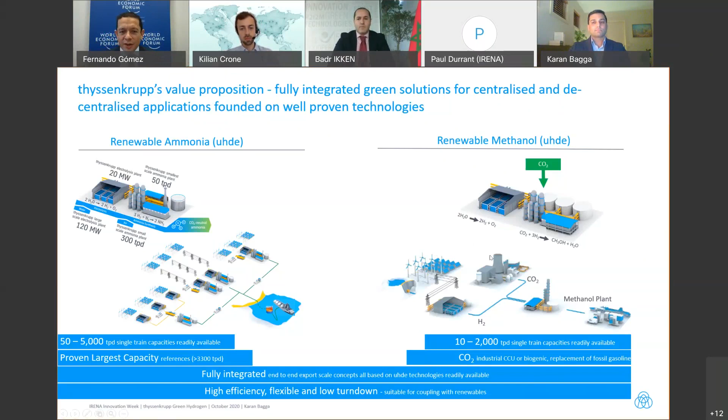So I'm happy to welcome Dan Feldman to share his perspective. What is missing to make this work? What is in the way of really allowing this integration to take place, especially for those making decisions on investing in these projects? Welcome, Dan, and thanks.

Thanks. So I'm a bit of an unusual presenter on this panel in that I'm a lawyer. I'm not an engineer, I'm not a scientist, but what I'm responsible for is helping projects in this area actually happen. What that means is the rubber hitting the road on all of the technological issues that Karan and others have mentioned around intermittency, and what that means in terms of trying to get a project structured properly.

As well as the fact that, as people have said, currently whilst we may all hope that one day ammonia is as tradable as oil, currently it isn't. Therefore projects getting done today at scale need to contend with the fact that there is no downstream market at the moment, and they're trying to structure themselves in a way that persuades lenders and others that one day there will be a merchant market sufficient to take all of this quantity of product. And so that's going to take us into questions about how do we finance these things, how do we get them done.

As well as how do we ultimately ensure that we have projects which are sufficiently well structured in order to make the industry happen, apart from the discussions about how it should happen by virtue of everybody's decarbonisation commitments.